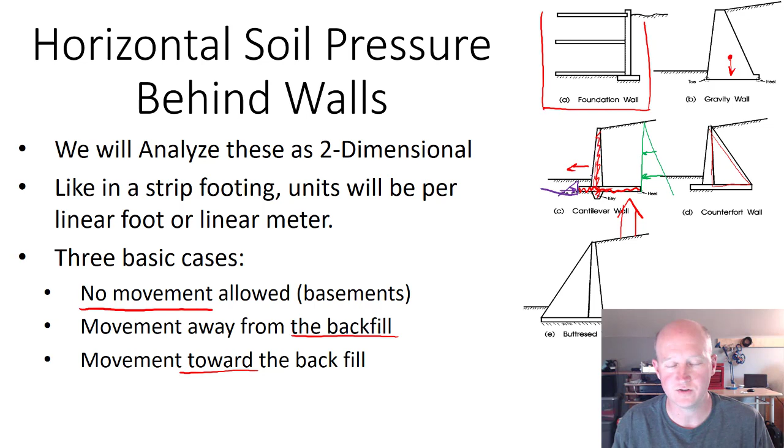In general, we'll be doing the statics calculations based on a two-dimensional infinite length of wall, on a per unit length basis. In addition to the no-movement possibility, we'll have two possibilities for movement: either moving away from the backfill or toward it. If we let this wall move away from the backfill, we can calculate a reduced pressure on this side, but that also means it's moving toward the soil on this side, so we'd need to increase the pressure at the toe. Sometimes we'll discount that toe pressure for safety reasons - maybe a utility worker needs to excavate there, or there are questions during construction about how it will be built. But in essence, that's the problem.

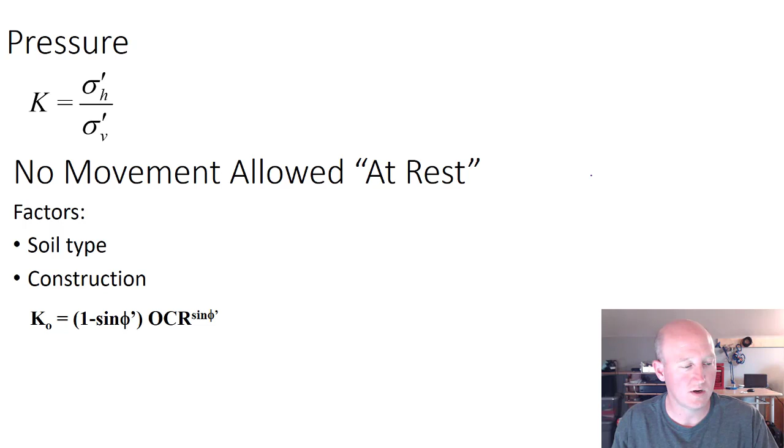First, we want to look at how we're going to calculate pressure. In general, we think about K as the ratio of the horizontal to the vertical stresses within the soil. Soil has strength, so unlike a fluid where pressure is equal in all directions, we're going to have a different vertical pressure than horizontal pressure. Sometimes instead of H I'll talk about X, and instead of V I'll talk about Z, but essentially that's what we're talking about.

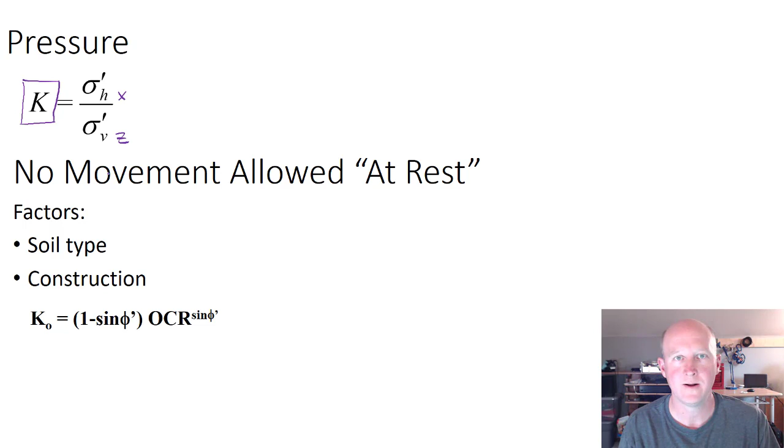Depending on what book you use or how people learned, they may use different variables, but essentially K is always the ratio of horizontal over vertical stress. Now, we know how to get the vertical stress - we learned that in fluid mechanics or soil mechanics, and it's just the weight of the soil minus any buoyant force when doing effective stress calculations.

The first condition we talked about is the no-movement condition. In a lot of ways it's mathematically easier to work with, and conceptually it's probably easier too. In general, we describe the no-movement condition as 'at rest' - describing the soil. The soil's at rest, it's not moving either away from itself or toward itself. The at-rest condition has a K associated with it, often demarcated as K naught.

The things that go into K naught are: what's the soil type? What's the construction history - has there been great loading and then unloading? Because that can induce a higher horizontal stress than would otherwise have been the case. For example, for a highly over-consolidated clay, your horizontal pressure can actually be greater than the vertical pressure sometimes. So here we can take into consideration the overconsolidation ratio, soil types, and the weight of the soil - all those things that factor into vertical stress also factor into horizontal stress.

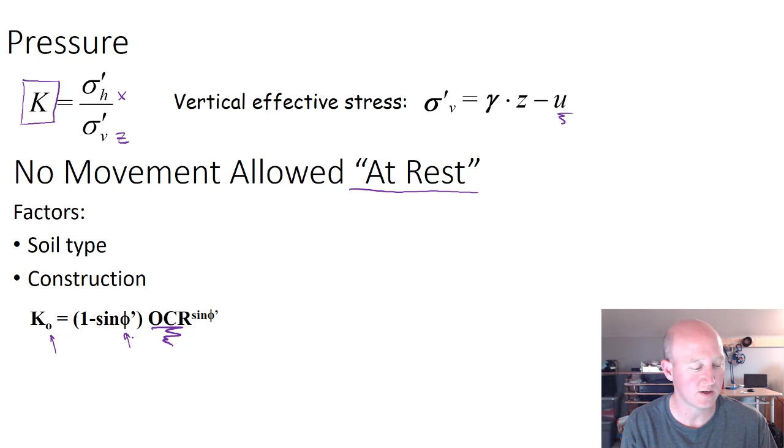So the more interesting case is when we do allow movement. The first one we'll look at is movement away from the backfill. That's called the active case. There's some vocabulary we've got to learn about.

The idea here is that if this is the wall, it's going to move away from the backfill. It's not that we're grabbing the wall and pulling it. It's really more like the soil starts to expand a little bit, and that pushes the wall. So we're going to let that wall move a little bit, which means we can design with a little bit lower horizontal stress. We're going to put a factor of safety on this so we know the wall's not going to just continue to move, but the actual stresses we'll be designing with will be lower.

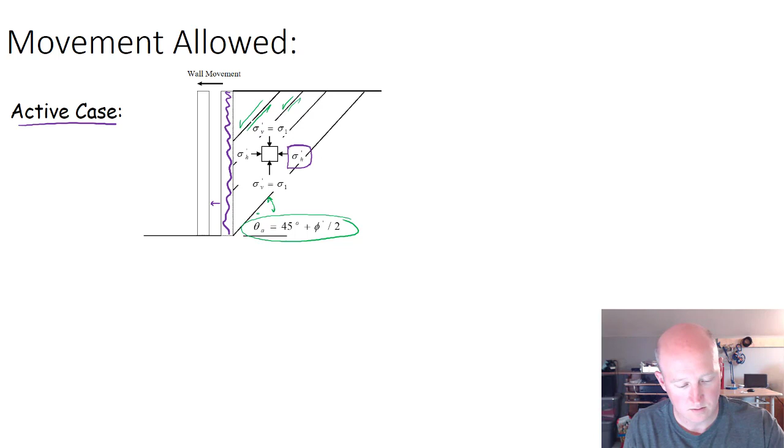If we go to the fully active condition, that means the soil is actually starting to fail. We're starting to get failure planes developing within the soil, and they have a certain orientation associated with the friction angle of the soil. So we get a relatively steep angle, because the soil is going to support some of its own weight. The higher the friction angle, the steeper this angle is. We'll talk about friction angle here in a second.

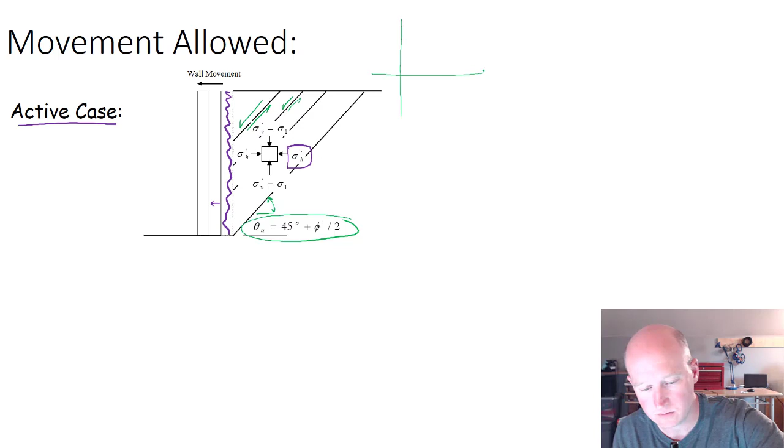That's a strength parameter. So if we're at the fully active condition, remember Mohr's circle — if we draw it out, the maximum principal stress is sigma 1, and the minimum principal stress is sigma 3. In the active condition, the vertical stress is sigma 1, and that makes the horizontal stress sigma 3. We're going to come back to seeing some more strength stuff, so we need to learn more. We want to do some examples with this.

So the passive condition is sort of the opposite of that. For K active, it'll be K a, and K passive, it'll be K p. In the passive condition, we've got a wall that for whatever reason is being pushed, probably externally — it has to be externally — towards the backfill. So the wall is being pushed towards the backfill, and we want to know what the soil pressure is on the other side of that.

In this case, we get something that looks a little bit more like a thrust fault if we were thinking about geology. So we end up with a much lower angle, and that angle is again related to the friction angle. We'll see that in some Mohr's circle stuff I'll show you here in a second.

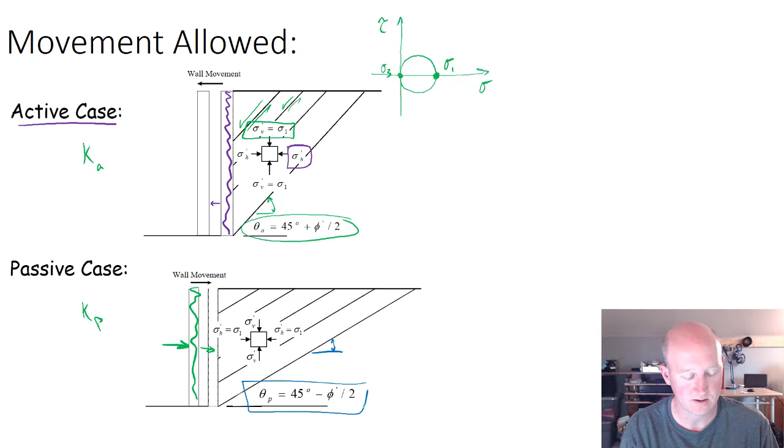What's happening is there's a bunch of little failure planes developing within the soil, and if you look closely, these are going in the opposite direction that I drew up above. So what we're doing is pushing on the soil until it starts to fail upwards, and at that point the soil can't resist anymore. It's actively failing. It's not going to get any stronger as we push it up the hill, so that's sort of a maximum possible value that we would use.

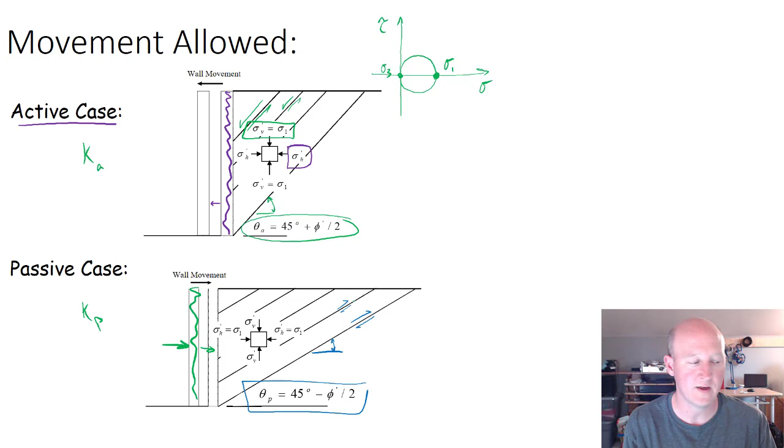We're going to have conservative assumptions built into this, but for now what we're trying to do is just figure out the theoretical pressure that would be on the wall in that condition. So in order to do that, we need to know a little bit more about strength. This is just a quick review of strength. In general, what we'll say is anything on this side is not possible.

And I guess it's probably good to review what the figure is. So this is just one quadrant of Mohr's circle.

We've got compressive to the right, and soil generally doesn't hold tension, so we're ignoring what's going on to the left on the tension side. And because Mohr's circles are symmetric, we can ignore what's going on the bottom, so we can just draw what's happening on the top.

So if we had sigma 1 and sigma 3 that looked something like this, that would be soil that's considered stable. And as the deviator stress, the stress between these two, increases, maybe it's in the field, or I think the easiest way to describe it now is within lab tests. So let's take a look at some lab tests, some ways to do soil strength testing.

One of them is a triaxial test. The idea is that we can put a soil specimen in here and separate it from a fluid chamber with a latex membrane. We can pressurize that chamber, and that will pressurize the soil. Then we can add an axial load through the center of that chamber, and we've got some seals to prevent leakage, so we can test the soil under different confining pressures.

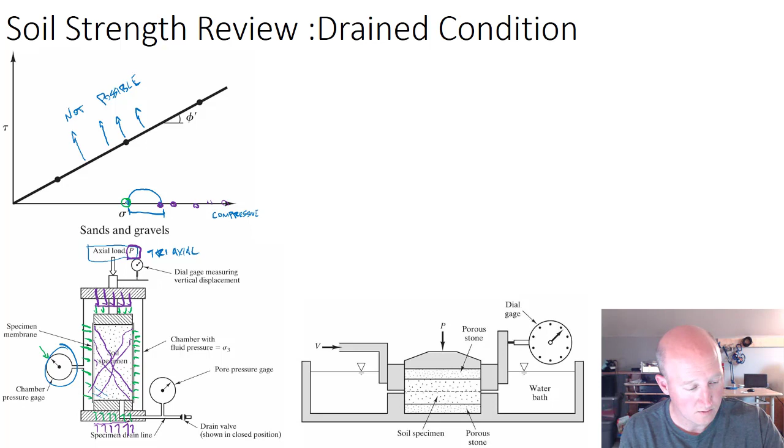So the idea would be that our 10 psi might represent this point, and that we could keep increasing the axial stress until our Mohr's circle actually intersects this failure plane.

And we would do that several times under several different confining pressures. So instead of 10 psi, maybe we use 7 psi and 5 psi. With that, we would get different size circles. And based on different values of P, the deviator stress, we would be able to identify the geometry of this line.

And that line represents the maximum possible configuration of shear stress for a given normal stress. So this is our failure plane, and sometimes it intersects the axis here, so I'll write out the full equation. There's the y-intercept.

Here's our normal effective stress. And here we've defined phi prime as the angle of that failure plane. And then the normal stress is the stress that's normal to the failure plane.

And I think that the triaxial test is a little bit harder to understand. But if we take a look at the direct shear test...

In this case, we're applying the normal stress through a thing P. So as we increase P, we are increasing the stress on this soil along this dotted line, the plane. We'll choose a value of normal stress, P, and then what will happen is we'll just start to increase the horizontal stress, which will eventually cause the soil along this specific failure plane to fail.

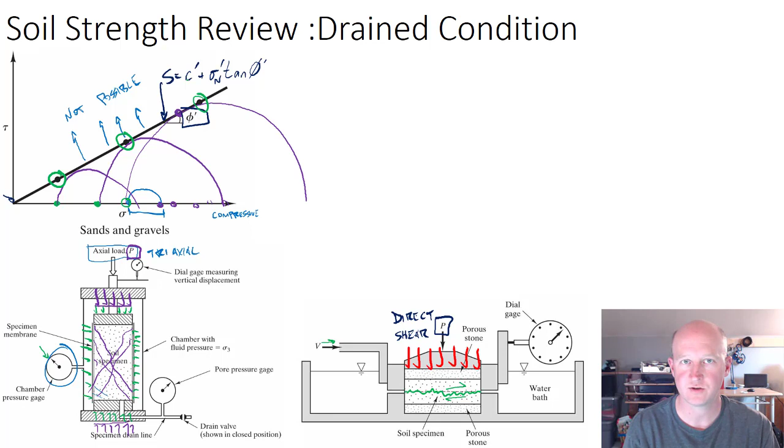So what is really happening when the wall moves away from the backfill is that the horizontal stress is dropping and dropping and dropping, until it can't get any lower. And once that happens, this thing will intersect the failure plane. Our initial condition was K naught, the at-rest condition.

And we can even take a look at how this geometry works. In Mohr's circle, we know that we rotate twice as far as we do in real space, and so there's 90 degrees. This angle right here, due to this geometry, is also phi. And here's our point that we're going to start rotating from - that's the vertical plane.

And then we would rotate 90 degrees. Here's our 90 plus phi, but then we've got to divide that by 2. So we rotate 45 plus phi over 2. This is 45, this is phi over 2. And that's how we get this angle. That's why we know the orientation of those failure planes.

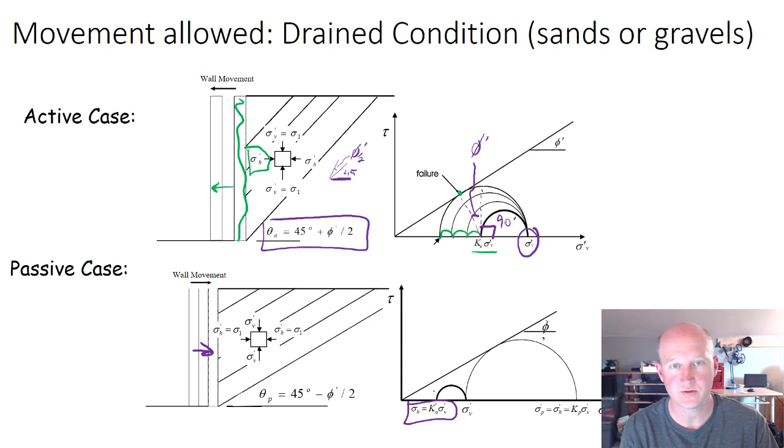In the passive condition, it's basically the opposite. We'll start at some at-rest condition, and as the wall starts to move towards the backfill, the horizontal stress is going to increase and increase and increase, and it will keep increasing as the wall moves closer to the backfill until it reaches a maximum value. The horizontal stress has reached the highest value it can, and all of the soil is failing.

And it's being pushed up this sort of thrust fault. And so, again, the geometry for that one is here. Let's get a better color. Here's the vertical stress, and here's 90 degrees. Here's phi. And so in Mohr's circle, that would be 90 minus phi. Or in real space, it would be 45 minus phi over 2. So that's why we know the orientation of that.

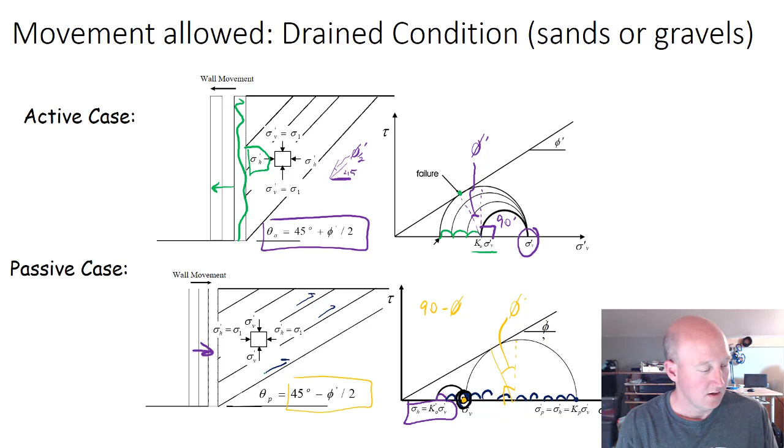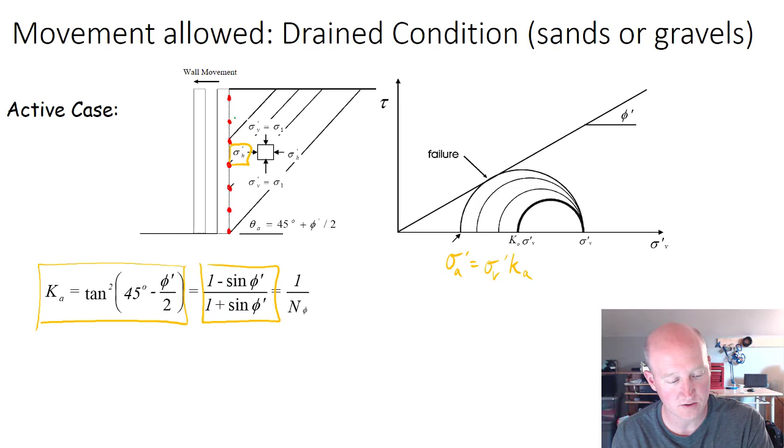So now we can actually calculate what the horizontal stress would be at any point along the wall. It's important to recognize we still haven't really started to work the statics problem, because what we need to do is know what the stress is all along the face of the wall, and then we would integrate that. It's simple enough to use a triangular pressure distribution because we know that's going to be the geometry. But for now, all we've talked about is how to get the horizontal stress at one specific point. We can do the same thing for passive.

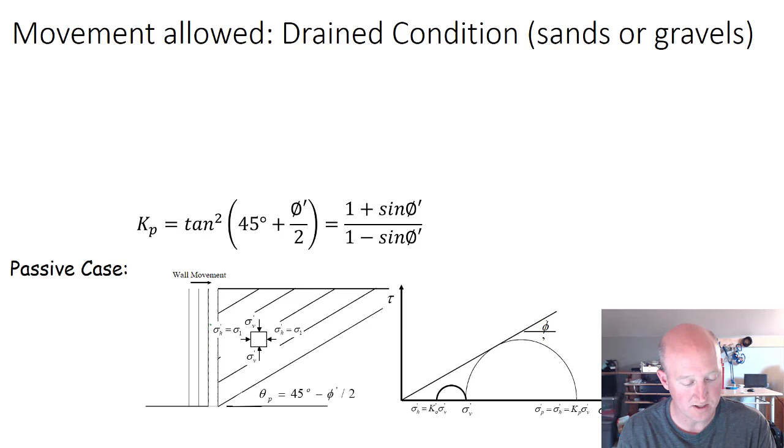So for passive, again, we're going to be able to calculate what the horizontal stress is. Here is the equation. And so the difference between K active and K passive is that K active, this was a minus, or on this side, these two signs switch. But otherwise, that's how it works.

Remember now, this is only for soils that don't have cohesion. So this is basically sands and gravels, and if it's partially saturated, then we can have a suction effect due to the wicking.

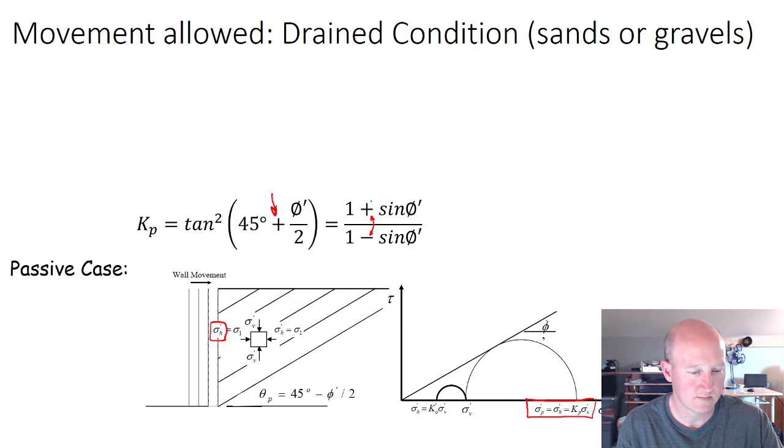So what about undrained? This is clays in the short term. Now in the long term, clays are going to behave a little bit more like this, and this is one of the most confusing things to try and teach: how clay behaves in the short term versus the long term, or the undrained versus the drained condition.

When we're talking about drained and undrained, we're not talking about letting water seep out of it. What we're talking about is excess pore pressure that's generated whenever a compression event happens. If we squeeze clays, the void ratio, the space between the clay particles, is decreased. We're going to say that the clay particles themselves are not compressed, but that the void space between them is compressed. But if those voids contain water, then that water's got to squeeze out, and it takes a while.

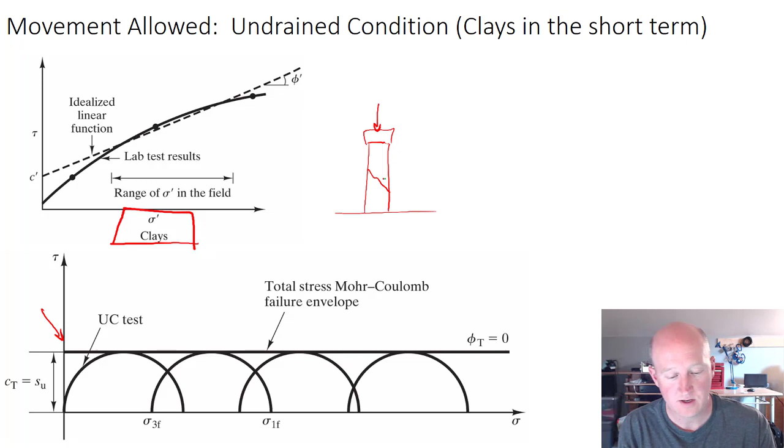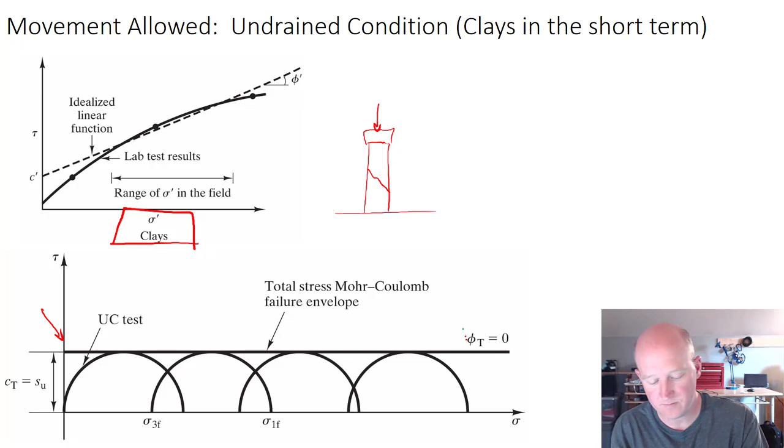And so what that means is we can't get things like strength gain or strength loss in the short term. We can get it in the long term. So in the short term, we can talk about an unconfined compression test. Here are the results for a short-term unconfined compression test. A chunk of clay gets put into a load frame, and we apply a big load to it, and the soil fails, and we just load it up really quickly. So that opportunity for volume change hasn't happened. And so what it turns out is we get a phi that's equal to 0, and a cohesion term that we'll describe as SU.

So for clays, when we're going to have the wall move away from the backfill, so here we go again, same figures as last time. This is the active condition. And so the wall is moving away from the backfill.

The horizontal stress on a chunk of soil is decreasing, and it keeps decreasing as the wall moves away. The big thing here is that now we don't have an angled failure envelope.

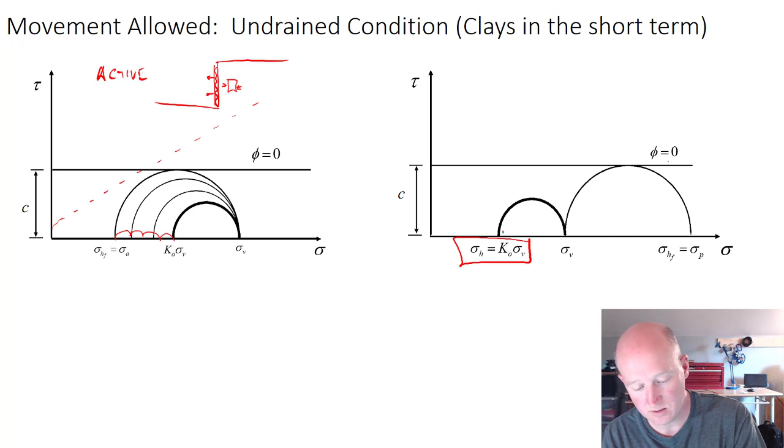Same thing for passive conditions. We start at the at-rest condition and increase the stress because the wall is being pushed toward the backfill, creating a thrusting action. The horizontal stress increases until it reaches a peak value. So how do we calculate those values?

It turns out it has to do with the geometry of a Mohr circle. It's a bit easier to see on the passive side. If we want to know the horizontal pressure, we just take the vertical pressure and add to that. If this is the radius, and the radius is C in this case, we just add 2 times C.

On the active side, we calculate the vertical stress and then reduce it by 2 radiuses.